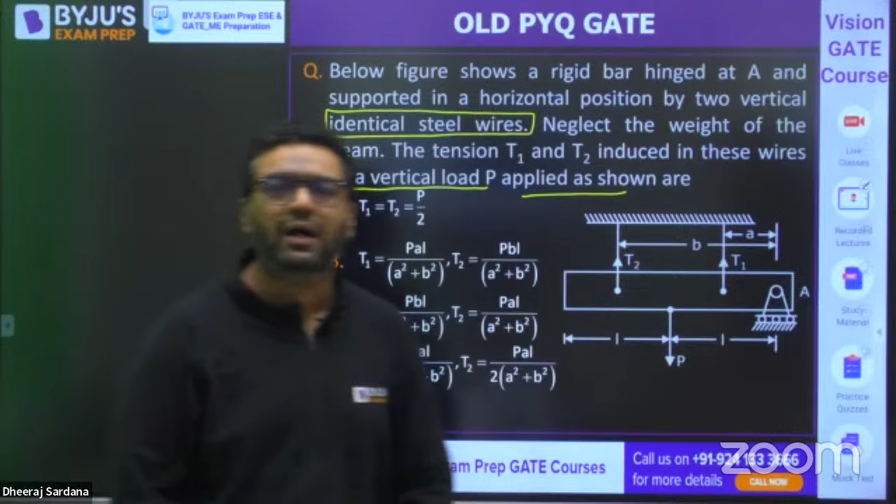So guys, will you try this or shall I start? This is a question, four options are in front of you. This is a very good question, and I strongly feel this type of question can appear in the exam. This is a very, very good question. If you want, I will give you a hint. Papa Ghoda is saying the answer is A. Very simple - it is not that simple, dear. No issues, I will be solving it for you.

So my dear, if you see this, I am taking it as the longitudinal axis of this member. At this point, you are providing a hinge kind of support - this is a hinge support. But you know that about hinge, it is free to rotate. So what will happen because of this load P? This is going to go down like that. It is not going to rotate completely because these wires will not allow that.

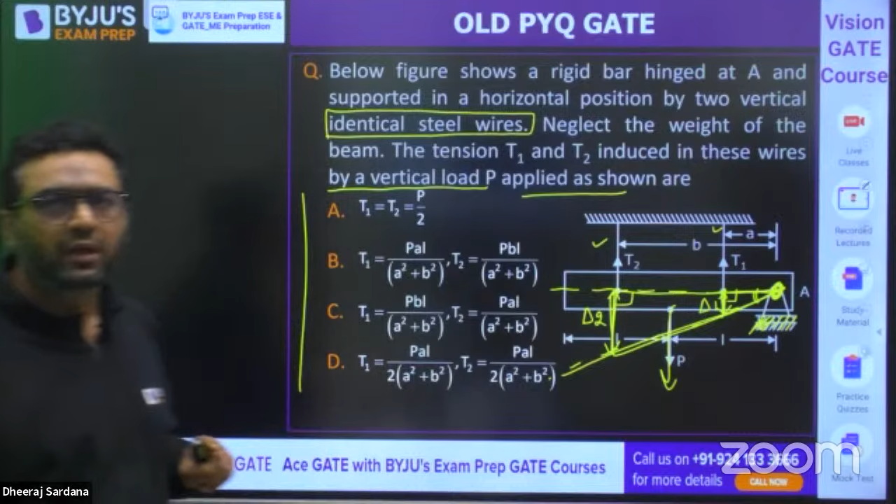When this rod goes to this position, wire 2 will be deformed by some amount - that deformation I am showing as delta 2. And this wire will be deformed by some deformation delta 1. Up to this, the rod will take this position. Now if you see, this is one triangle, this is another triangle. In both triangles, this angle is 90, this angle is 90, and this angle is common. If two angles of the triangle are equal, obviously the third will be equal, and that is why angle similarity is there. Because of angle similarity, you can write delta 1 by A equals delta 2 by B.

So by similar triangles, delta 1 by A equals delta 2 by B. Now you know we can write delta 1 as T1 L1 by A1 E1, and delta 2 as T2 L2 by A2 E2. So T1 L1 by A1 E1 equals A by B of T2 L2 by A2 E2. Since they are identical wires, E1, A1, L1 and L2, A2, E2 get cancelled out, and you get T1 equals A by B times T2.

Now, my dear, you got one relation between T1 and T2. Now you know there is a hinge point given. Whenever a hinge point is given, in GATE questions you have to take summation of moment about the hinge to be zero, and only then will you reach the final answer. So you will say summation of moment about A is going to be zero. You can see this P is creating anti-clockwise moment, T1 is creating clockwise, T2 is creating clockwise.

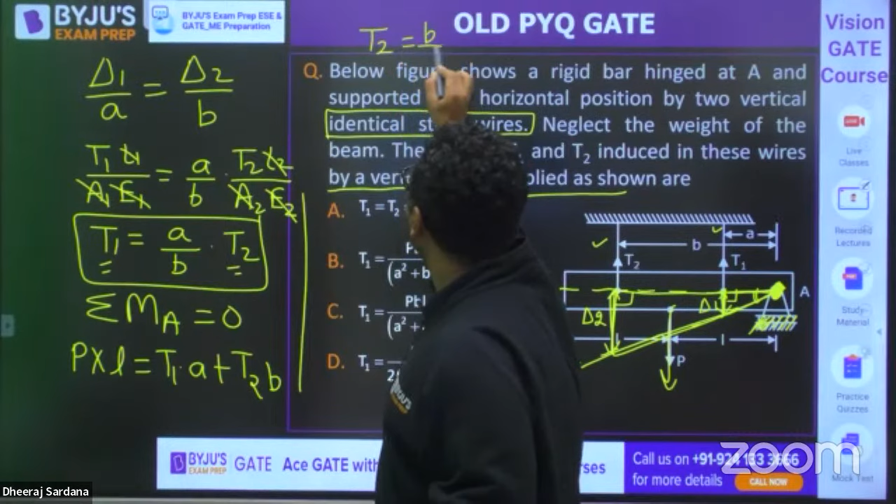So you can write P into L is equals to T1 into A plus T2 into B. Now you already know the value of T1 in terms of T2, so you would put this value. You would say P into L is equals to T1 into A, and you know T1 is A by B T2. You can also write T2 is B by A T1. So putting B by A T1 into B.

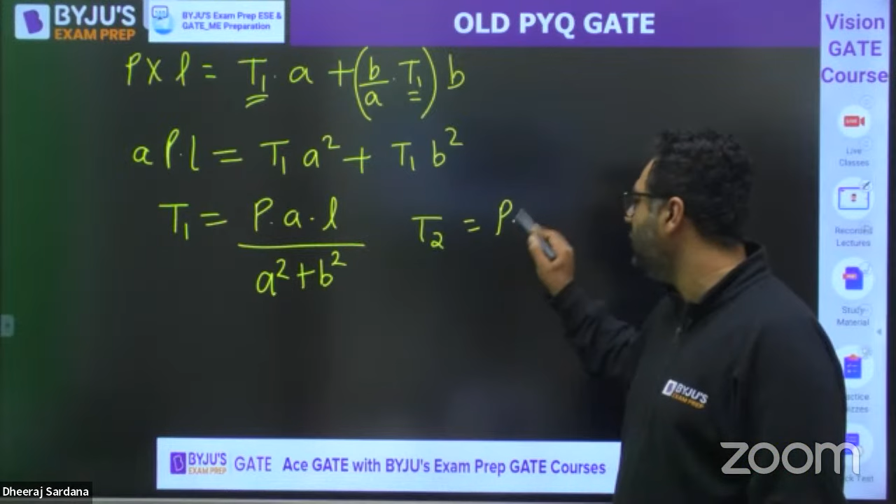Now you can see T1 is there, T1 is there, so you would be getting A into P into L is equals to T1A square plus T1B square, divided by A square plus B square. So T1 is coming out to be P into A into L divided by A square plus B square. Similarly, you will get T2 as P into B into L divided by A square plus B square.

So the answer for this question is T1 is PAL, T2 is PBL. B is the right answer.

Very good, yes thanks Ami. D2E, yes Rohan, very good. TPM, very good. Yes Harkesh Shekhar, thanks for your wishes.

So guys, the first question's answer is B.

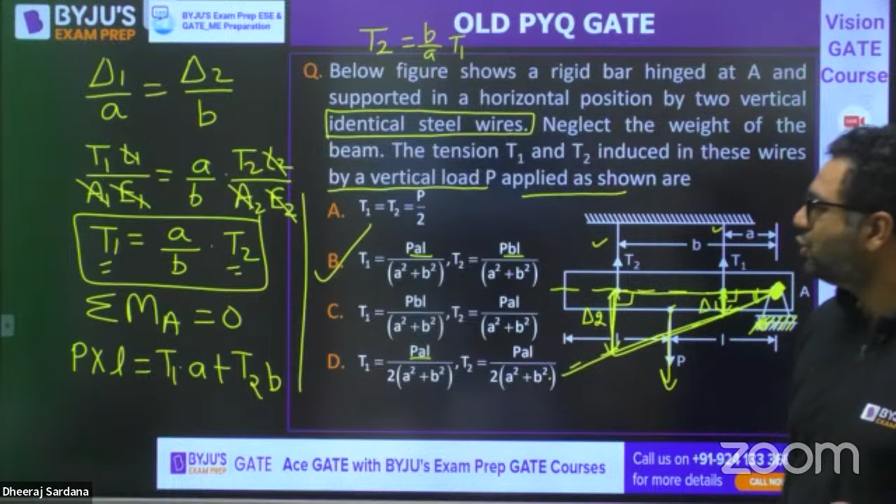Moving to the second question, this is from torsion, my dear.

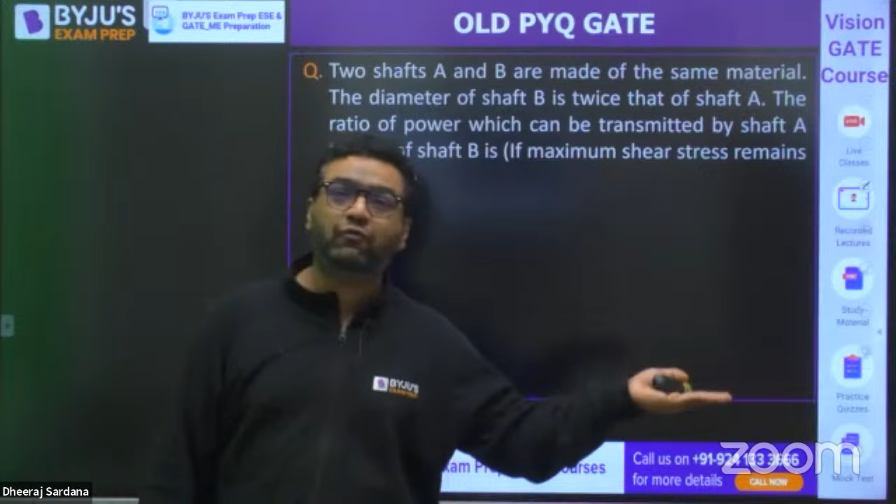These are not those PYQs which you have generally done, they are new PYQs for you. We have taken only good questions which are relevant for these years, which can come straight away. This is happening in many subjects. In industrial also, I have seen 3 questions repeated. In strength of material also, 1 to 2 questions have already been repeated. Like if you see the 2015 paper, the 1995 question was asked as it is. So that is why these questions are very relevant.

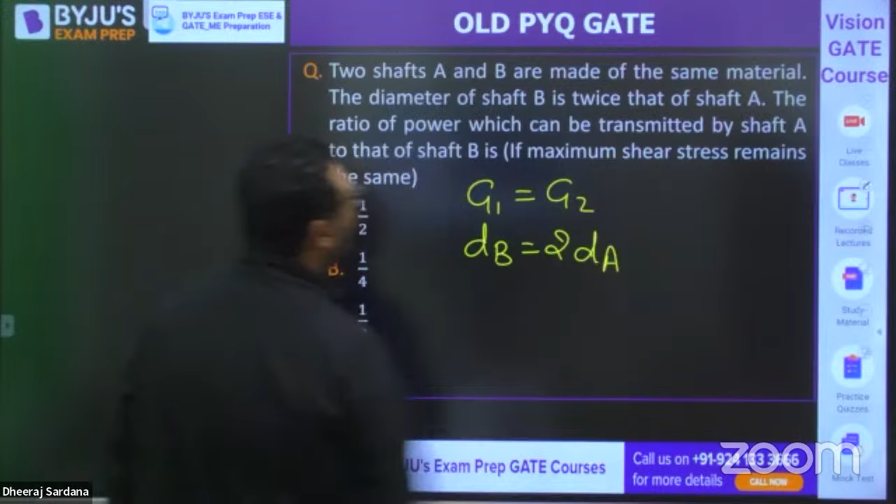This question says 2 shafts A and B are made up of the same material. When the material is same, I can say G1 is equal to G2. The diameter of shaft B is twice that of A, so diameter of B is 2 times diameter of A. They are asking the ratio of power which can be transmitted by shaft A to that of B. If you remember from the derivations, this ratio is equals to TA by TB, and that ratio is also equal to ZP of A to ZP of B.

So you know that when that is the case, you would write it as dA cube. Why dA cube? Because you know ZP is pi by 16 d cube. So when you put pi by 16 dA cube divided by pi by 16 dB cube, and you know dB is 2 times dA, the answer comes out to be 1 by 8.

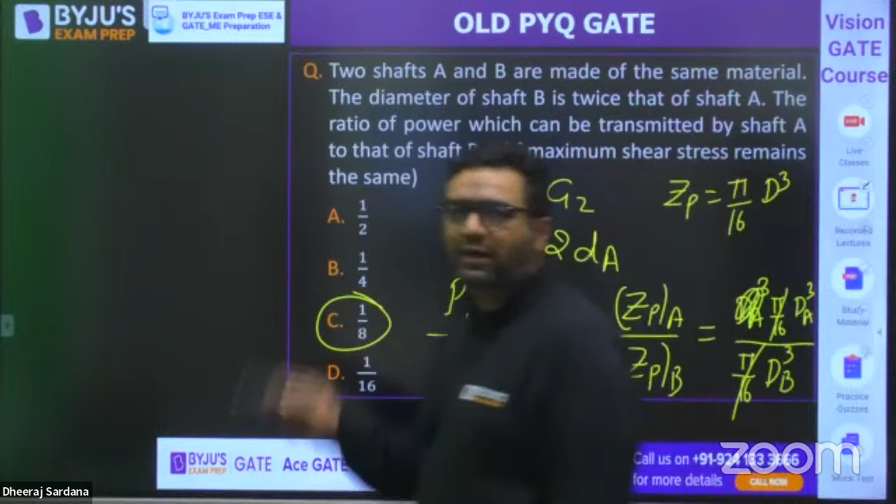Yes Rohan, you are correct. Papa ka Ghoda, TPM, everybody has given the right answer. The answer for this is going to be C, that is 1 by 8.

Very good guys, moving to question number 3, and this is related to principal stresses and strain. First of all, I am taking 5 questions, after that Abhinav sir will be joining for his questions, then once again I will come back.

So if the 2 principal strains at a point are 1000 into 10 power minus 6 and minus 600 into 10 power minus 6, then what is the maximum shear strain. This is an easy question, and the next question is something very beautiful, that question will give you a feel of GATE. So be ready for the next question, but answer this easy question first.

What would be the answer for this? Okay Nandu, Murli, so you guys are saying the answer is C. What about others? Rohan, TPM.

Okay, Rohan is saying the answer to be A. What about others? Alekia is saying A, Papa ka Ghoda is saying A.

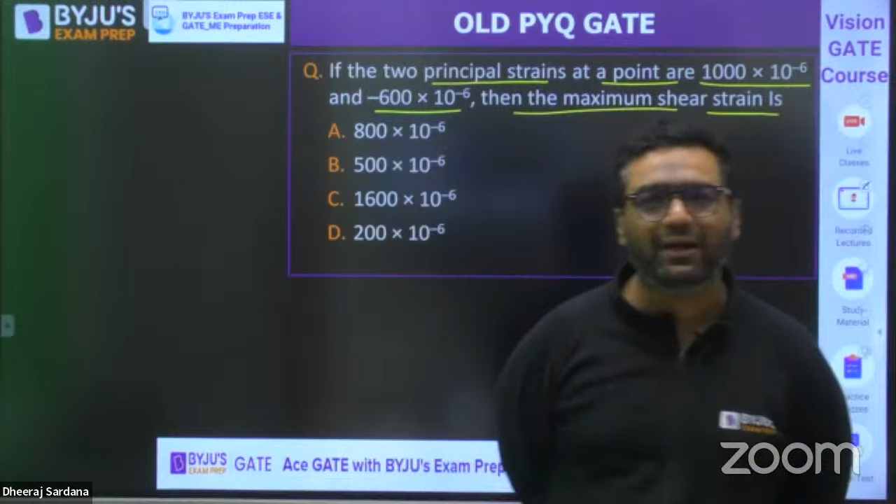TPM is saying C. Okay, so I would like to say, my dear, whenever you are writing the maximum shear

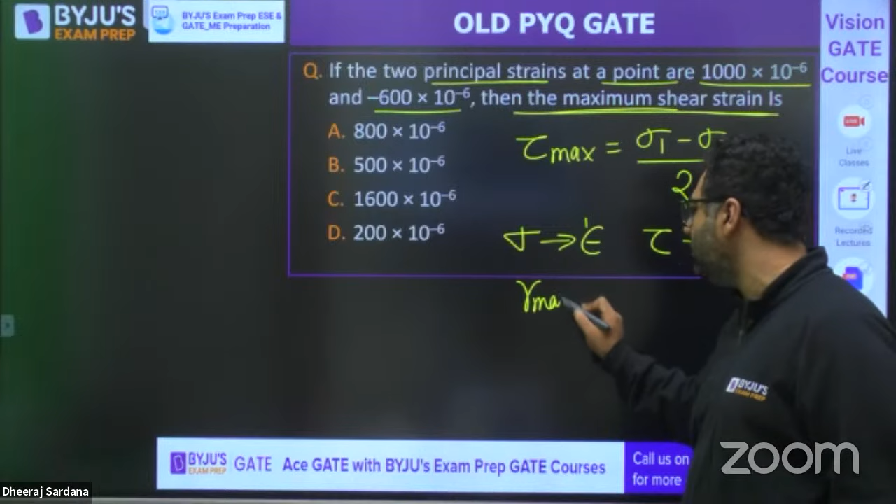strain, when you write the formula for maximum shear stress, tau max comes out to be sigma 1 minus sigma 2 by 2. But my dear, whenever we write the strain tensor with the help of stress tensor, then sigma is replaced by epsilon, tau is replaced by gamma by 2. So you would be having gamma maximum by 2 is equals to epsilon 1 minus epsilon 2 by 2. So my dear, 2 by 2 will get cancelled out.

Now you can very easily say what would be the answer. Gamma max is going to be epsilon 1 minus epsilon 2. Epsilon 1 is 1000 into 10 power minus 6, minus of minus 600 into 10 power minus 6. Answer will be 1600 into 10 power minus 6, and the answer will be C for this.

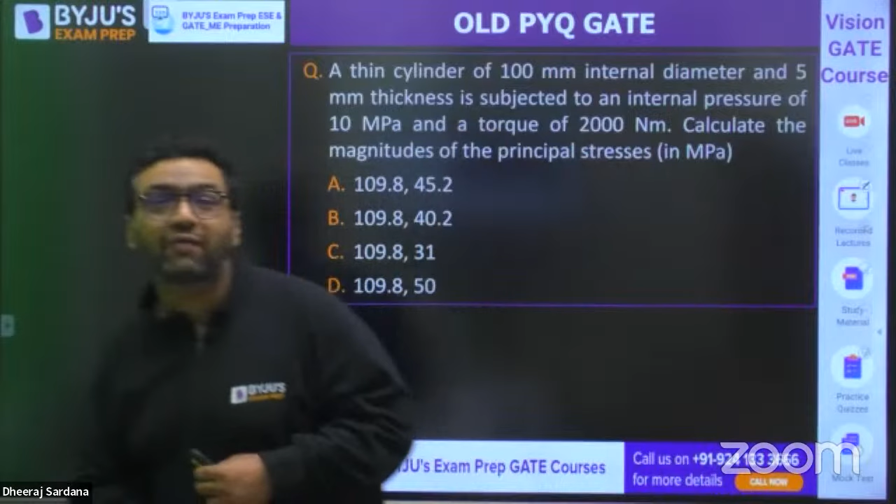This is a beautiful but easy question. Now, my dear, the next question is slightly new, maybe new for those who have not done this chapter in a nice way, but otherwise this is a beautiful question. This is a wonderful combination of principal stresses and thin pressure vessels.

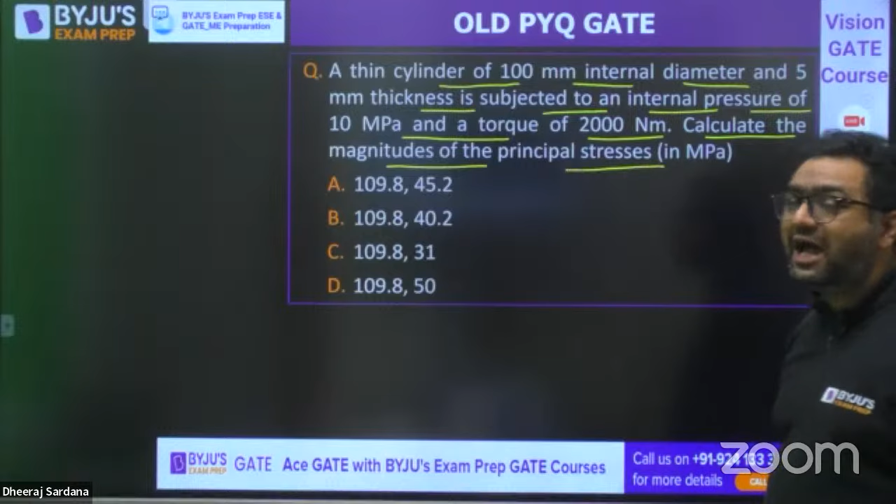If you see the question, a thin cylinder of 100 mm internal diameter and 5 mm thickness is subjected to an internal pressure of 10 MPa and a torque of 2000 Newton meter. Calculate the magnitude of the principal stresses. I will give you a hint for this because this may be a new type of question, since in recent years GATE has never asked this question.

So my dear, you already know whenever we are talking about a thin cylinder's state of stress, that when we make the thin cylinder, because of the pressure, there is a circumferential stress coming, and because of the pressure, there is a longitudinal stress coming.

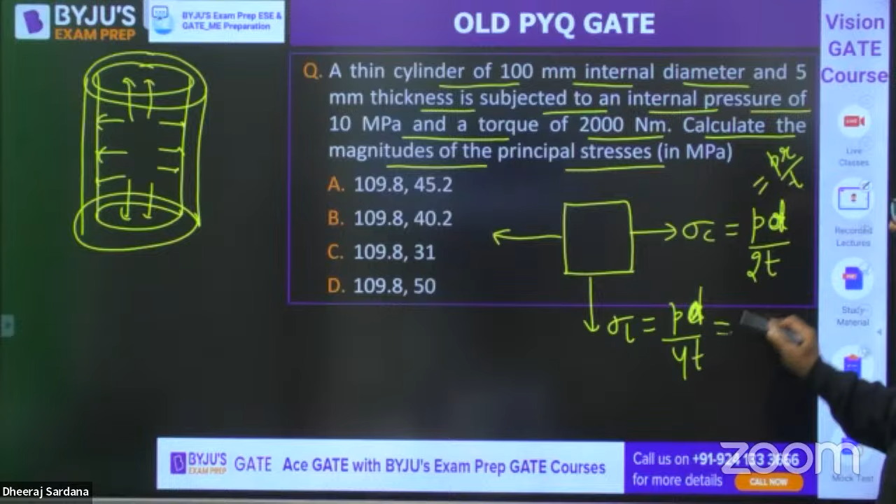So you would be making it, this is going to be the circumferential stress, which is PR by T. Okay, and this would be sigma circumferential, which is PD by 2T, and this is PD by 4T. Or if you want to write in the form of radius, it is PR by T and PR by 2T. Choice is yours in which term you want to write it.

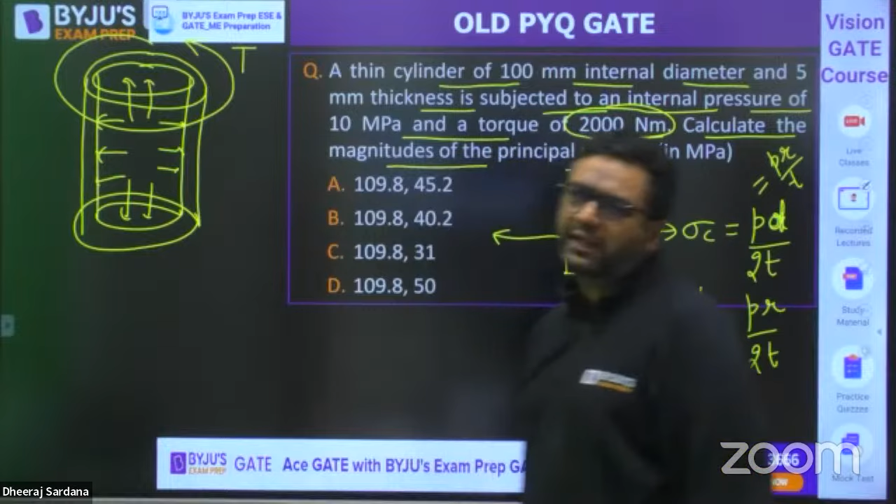So generally, my dear, we call these stresses as the principal stresses because there is no reason for shear here. But my dear, if you clearly see this question, they have mentioned that a twisting moment is applied on the cylinder. So when you apply a twisting moment onto this cylinder, equals to T, obviously it will be creating some shear stresses. And my dear, the shear stresses, if it is going to create on these planes, we will be having the shear. Whenever normal and shear are present together, it is said to be combined loading. In this case, you cannot say this circumferential and longitudinal are principal stresses.

You need to find out the principal stresses with the formula. Now, by looking at this, you can say circumferential stress is your sigma xx, longitudinal stress is your sigma yy, and you know that there is a stress tau, so tau is your tau xy. So if you know the formula of principal stresses sigma 1, 2, you would be aware that sigma xx plus sigma yy by 2, plus minus square root of sigma xx minus sigma yy by 2 whole square, plus tau xy whole square. This is the formula for principal stresses.

But to find out the principal stresses, you have sigma xx, you have sigma yy, but you don't have tau xy. So my dear, you will apply the torsion equation. You know T by J is equals to tau max by R is equals to G theta by L. So my dear, whenever you are talking about tau max or our tau xy, that will come out to be TR by J.

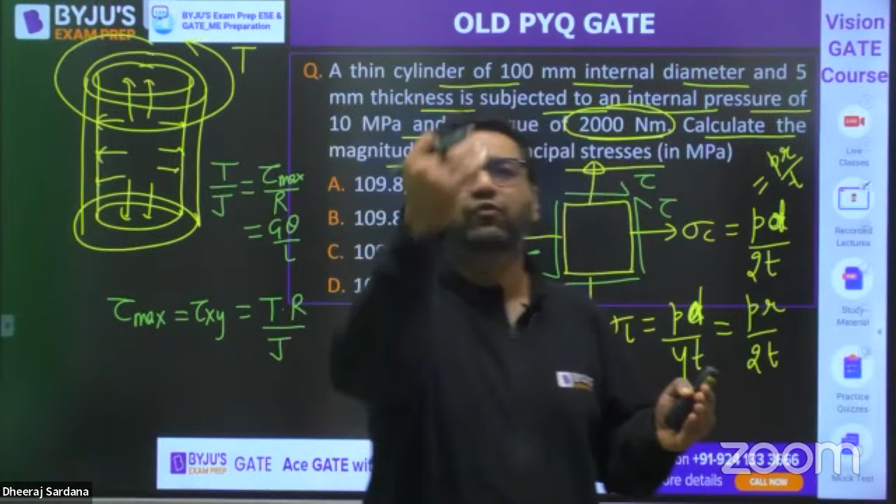Now, my dear, when we are talking about J, here is the real twist. This is a thin cylinder. If it would be a hollow shaft, we know that pi by 32 into d naught power 4 minus di power 4 will be the value of J. But here, my dear, whenever we have a thin section, the value of J is given as 2 pi r cube into T. This is the value of J for the thin section.

You derive this in engineering mechanics, and this is the approximate value for the thin section. In some books, they write this as pi dt into d square by 4. So the choice is yours, both have the same meaning. You can use any of the formulas and apply J.

You will get tau xy. Once you get tau xy, you need to put it here and you will be getting the principal stresses.

This is a wonderful question. You won't believe this type of question has come in the GATE exam many times, for 5 marks also, because before 2003 they were coming for 5 marks also, and the same question has been repeated 2 times for 2 marks also. So that is why I have taken this. You can have this type of question because 1 to 2 questions GATE people are asking with that much length. Don't worry, I will help you with the calculation.

You tell me what you are getting for the circumferential stresses. Circumferential stress is sigma xx, sigma c. It is P d by 2t. What value are you getting for this? Can you tell me? I will help you in the calculation. Don't worry, because mainly I wanted to teach you this concept.

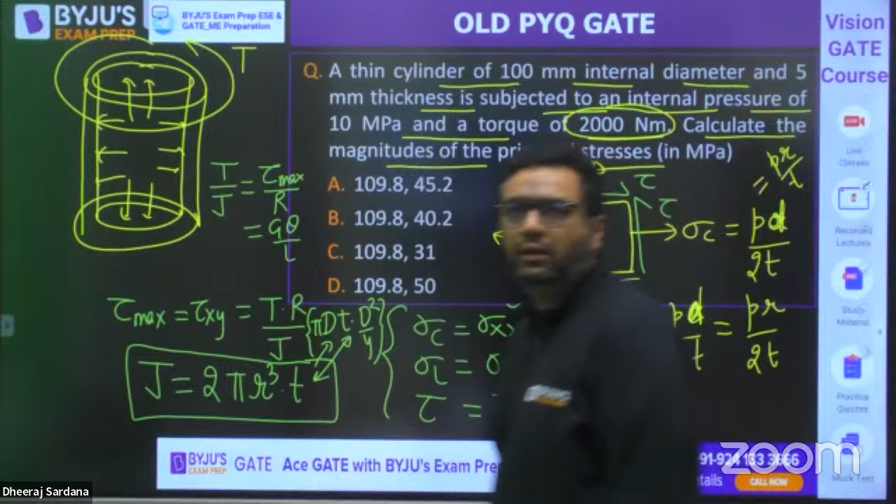Yes, Murali, Papa Ka Ghoda, Rohan, TPM. Tell me the value of sigma circumferential. Tell me the value of sigma circumferential.

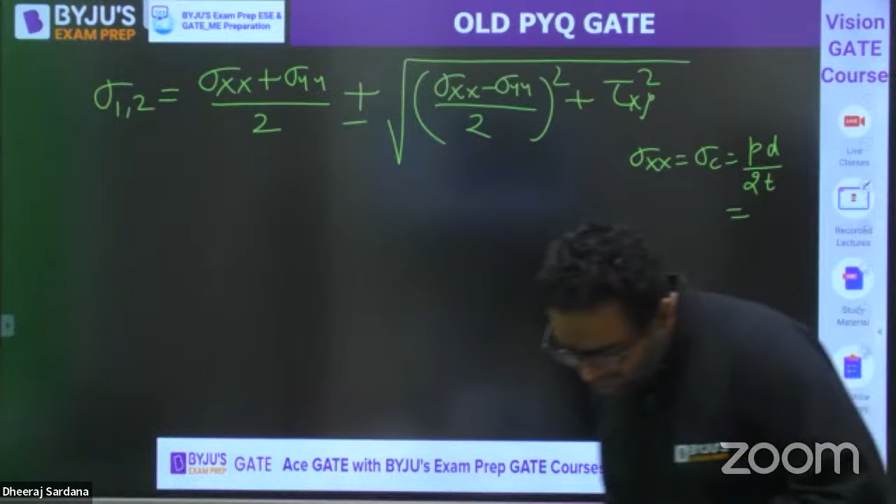You can see they have given the internal diameter as 100 mm. They have given the thickness as 5 mm. They have given the pressure as 10 MPa. They have given the torque. So when you put the value into PD by 2T, the circumferential stress would come out to be 100 MPa.

Okay, 100 MPa. When we talk about sigma yy, that is the longitudinal stress, that is PD by 4T, and that will come out to be 50 MPa by default. Yes or no? And when we find the tau max, that also I have calculated for you. Tau max, which is our tau xy, comes out to be 24.2 MPa.

So when you put these three values here, you will get the principal stresses. Wonderful, guys. So now you need to find out sigma 1 and sigma 2. I have given you all three values after calculation. Solve it and get the answer.

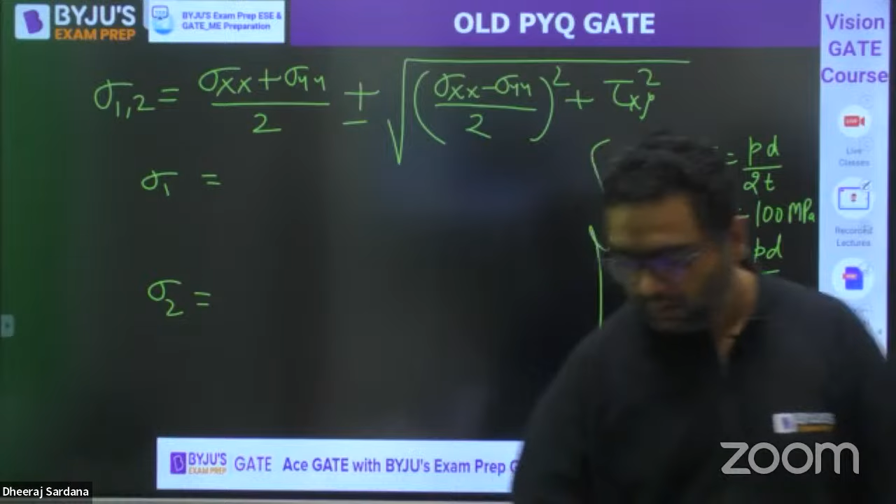Very good, Papa ka ghoda. Wonderful, dear. So now tell me the value of sigma 1 and sigma 2. Tell me, this is a wonderful question.

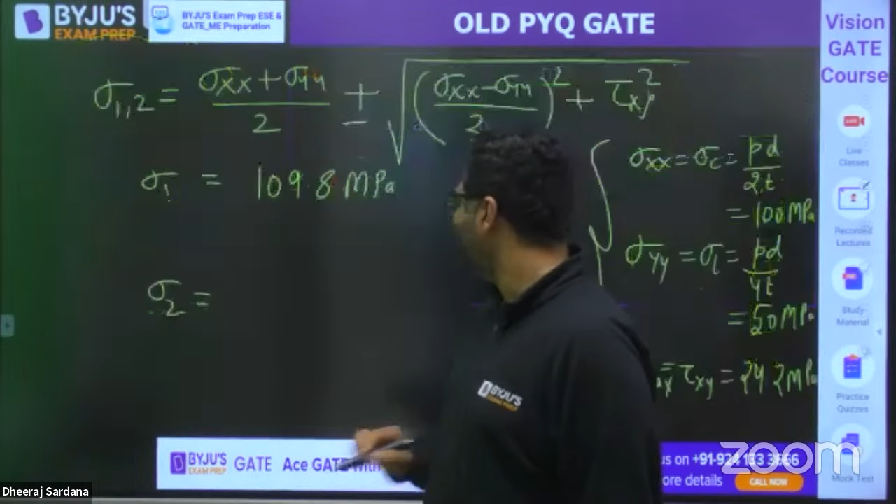TPM, you have already given option B, 109 and 40.2. That is correct. So whatever answer TPM is giving, it is the correct answer: 109.8 and 40.2. So I feel everybody got it.

This is a beautiful mixture of torsion, thin cylinder and principal stresses. Wonderful, guys. So now this was a heavy question, lengthy question, slightly difficult. So let us move to an easier one.

This is question number 5 from my side. For the case of a slender column of length L and flexural rigidity EI, built in at its base, meaning fixed support, and free at the other end. What is the Euler critical load for this?

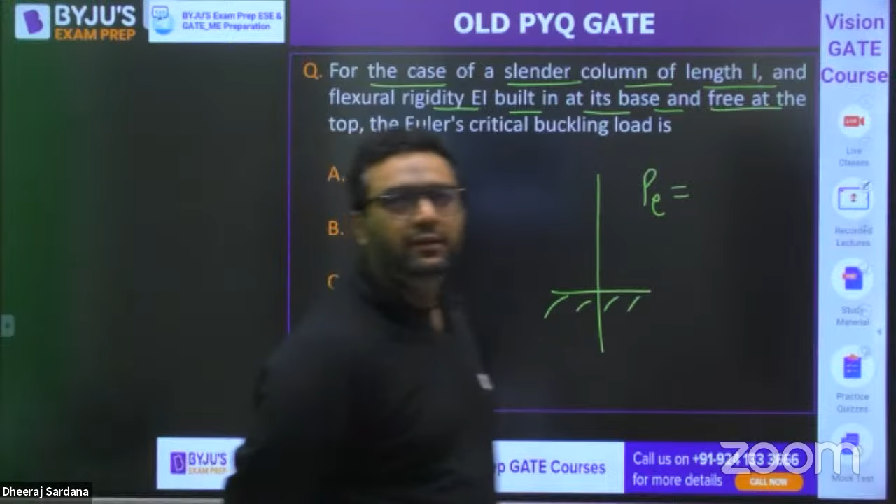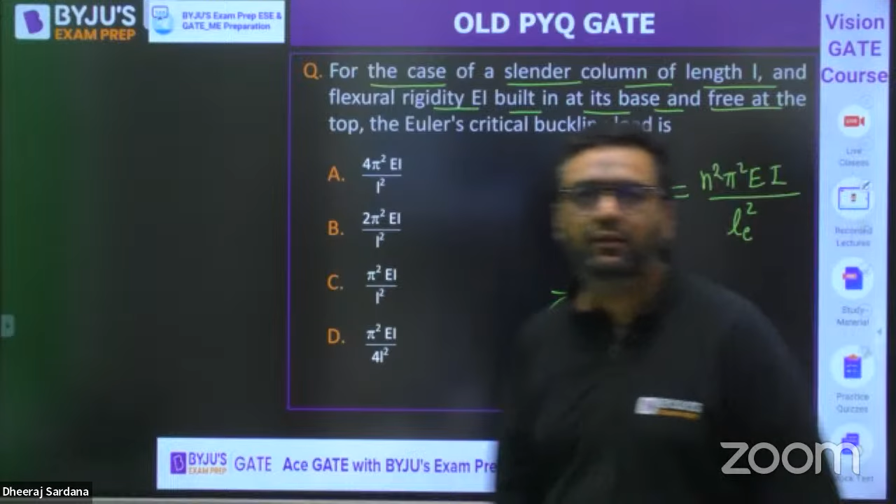Tell me. So Rohan is saying the answer is A. This is one end fixed, other end free. One end fixed, other end free. You know the general formula is n square pi square EI upon LE square. For this case, what is LE? Okay, Sushant is saying A. Arfat Qazi is saying A.

So my dear, you know that for this case, LE is 2L. LE is 2L, right? For this case, one end fixed, they are saying one end fixed and other end free. So when you put 2L and take N as 1, PE will come out to be pi square EI by 4L square. D would be the right answer. Did everyone forget the formula?

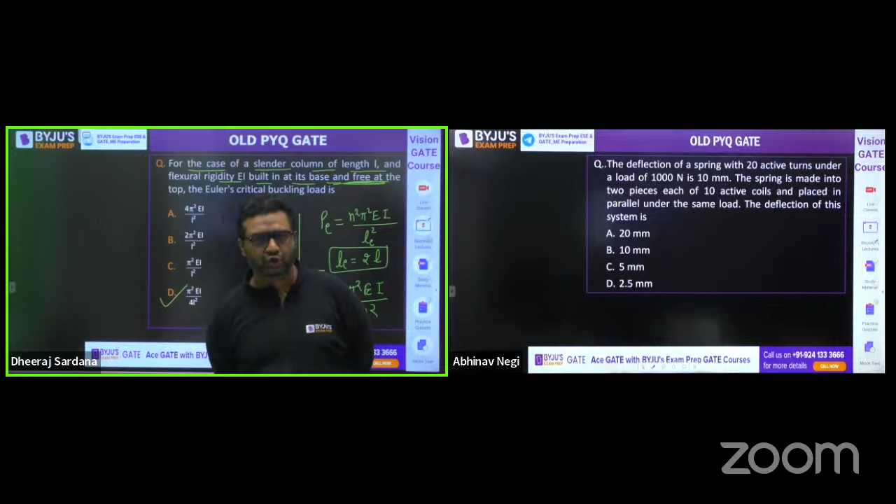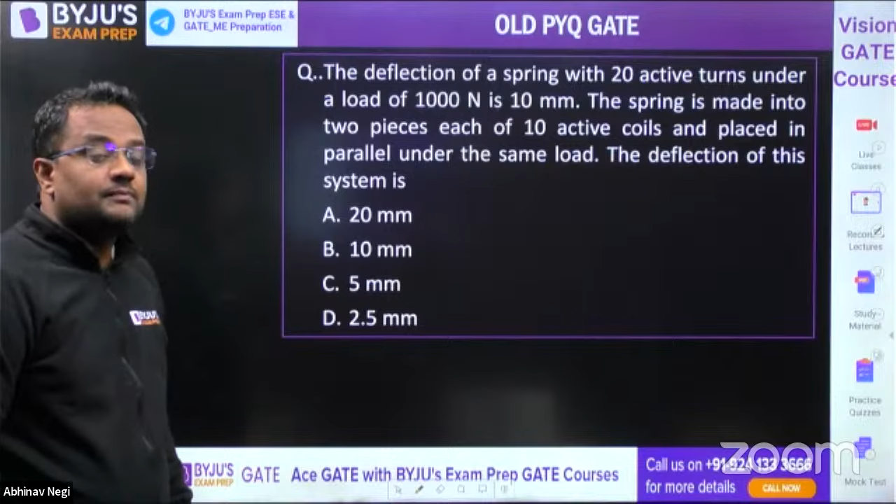Okay, this is the question guys. What is written here? The deflection of a spring with 20 active turns under a load of 1000 Newton is 10 mm. The spring is made into two pieces, equal pieces, because 20 turns are turned into 10 active turns, and they are placed in parallel. Then the same load is applied. Now what will be the deflection?

Earlier what is happening? You are applying 1000 Newton, so deflection is 10 mm. Now this spring is cut into two exact parts, and the two parts are put in parallel. So now with the same load of 1000 Newton, earlier deflection was 10 mm. Now what will be the deflection?

Before solving this, let me tell you the strain energy of a spring is 32 P squared R cubed into n by GD4. Applying Castigliano's theorem, deflection is given by del u by del P. So from here, deflection is given by 64 P R cubed into n by GD4.

What is P here? Load. What is R? From the center line, the radius at the end, that is R. n is the number of turns, and D is the thickness of these wires. D is the thickness of these wires. Now G is the shear modulus. This is the delta. What is stiffness? Stiffness is P by delta.

So P by delta from here is GD4 upon 64 R cubed into n. So when we cut the spring into two parts, material will be same, D will be same, R will be same, n is halved. So cutting into two parts, earlier the stiffness is K. If earlier the stiffness is K, now it will become 2K. So the K equivalent now in this case for parallel is 4K.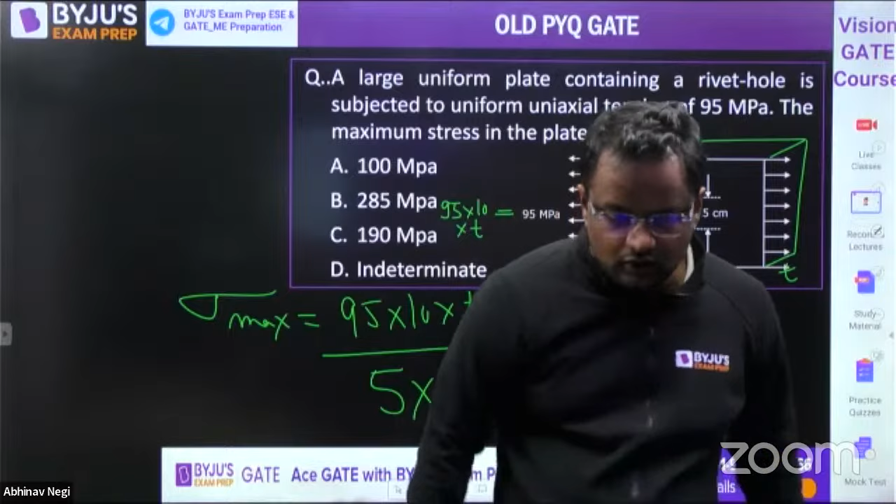Can any one of you tell me this sigma max is on which assumption? You might be thinking sigma max is fine, but it is based on an assumption. Tell me, this is on the assumption that there is no stress concentration.

That there is no stress concentration, guys. In actual life, in actual reality, stress is concentrated where there is discontinuity. Here there is discontinuity, because here it is material and here is empty. At this point, here it is material, here it is discontinuity. So actually at these points, stress concentration will be there, and there will be more stress.

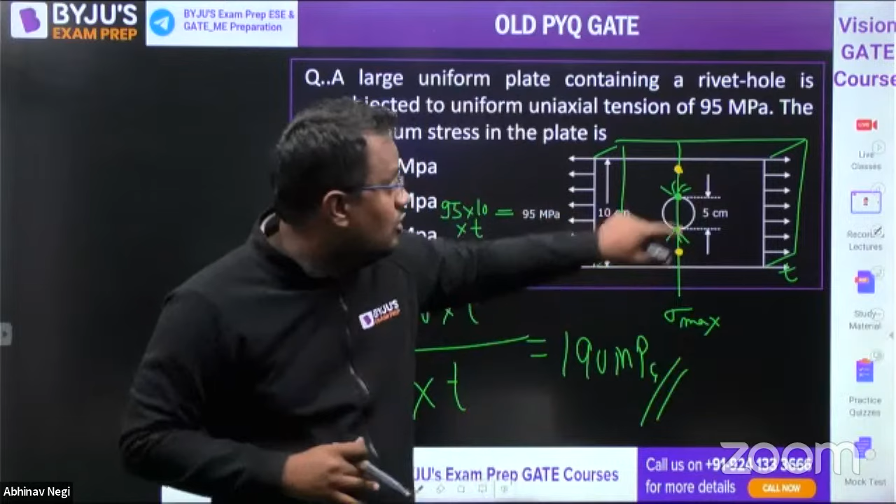Guys, this green point and this orange point. Orange point will, in reality, be having lesser stress, because at the orange point, material can go everywhere. But at the green point, on one side there is empty space, no material, only material is here. So the green point's stress is more.

In actual life, if you see the stress, it will be like this, and where there is a hole, stress will be more. So this is the actual scenario, but in our assumption, we assume constant stress all over.

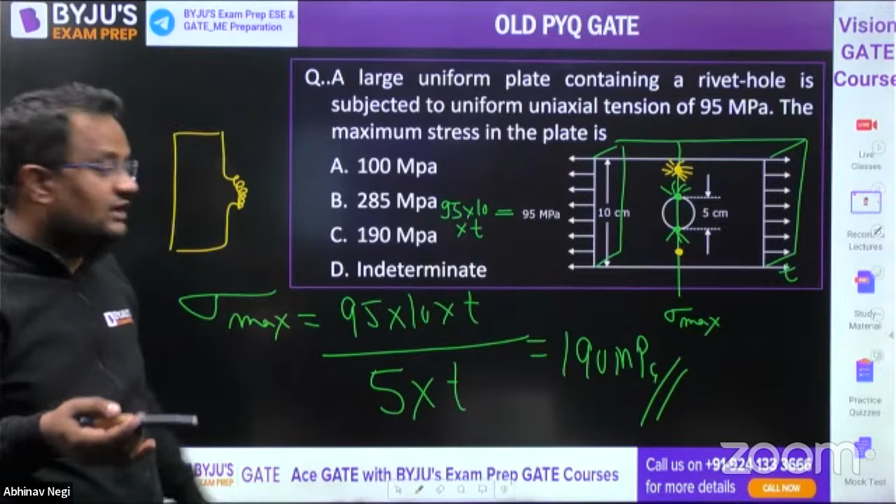An elastic body is subjected to a tensile stress X in a particular direction and a compressive stress Y in its perpendicular direction. So here is tensile stress X and here is compressive stress Y. Of course, one is tensile, one is compression, and magnitude wise they are not the same.

Now, on the plane of maximum shear stress, what is this condition? Suppose if their magnitude wise is same, then what happens? Our Mohr circle will be like this, with X point as tension and Y as compression. Then on the plane of tau max, because the center is exactly at the origin, on the plane of maximum shear stress, the normal stress will be 0. A will be the option in that case.

But here X and Y are not the same magnitude. This was the case when magnitude of X equals magnitude of Y. But in our case, the Mohr circle will look like this, with normal stress and shear stress axes. Suppose X is greater than Y, then it will be like this. If Y is greater than X, it will be somewhere here, but not symmetrical.

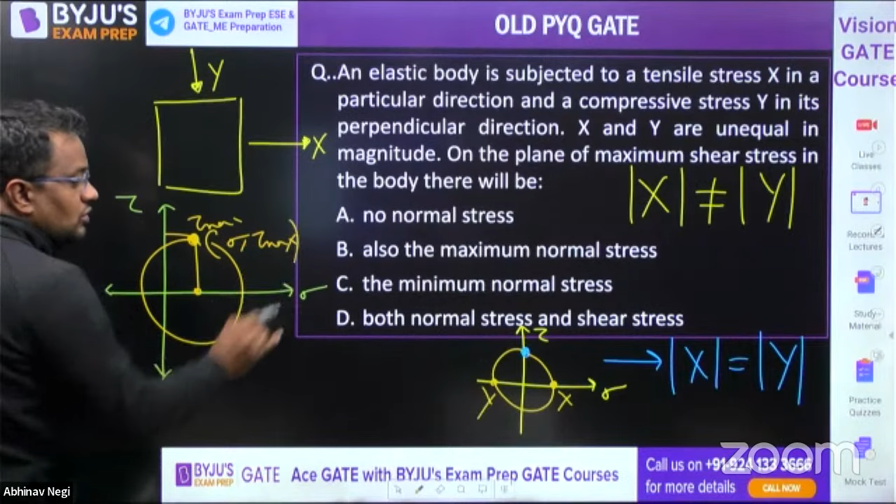So on the plane of tau max, this is the tau max, this is the plane of tau max. Here we are getting an X coordinate also, and we are getting a Y coordinate also. So both normal stress and shear stress will be coming.

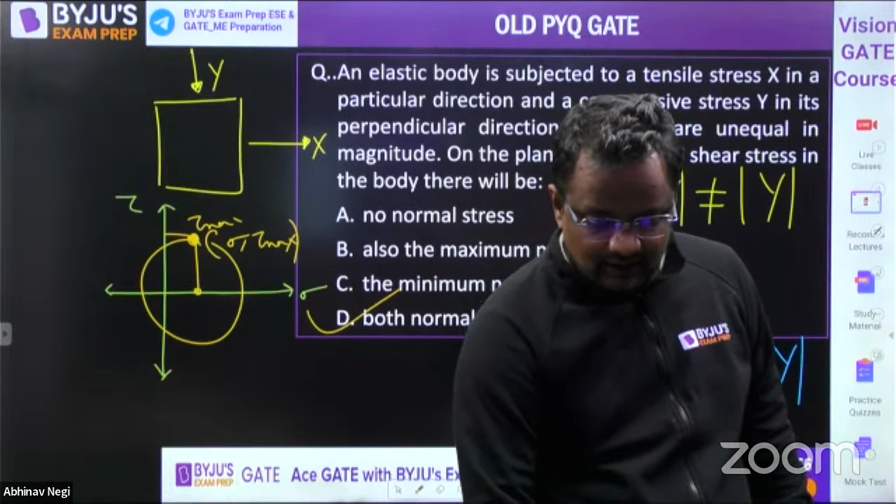Okay, moving further to the next question. A cylindrical elastic body is subjected to pure torsion about its axis. Pure torsion means no moment, no shear force, no axial force, nothing else is coming, just pure torsion. Suppose this is a cylindrical body like this.

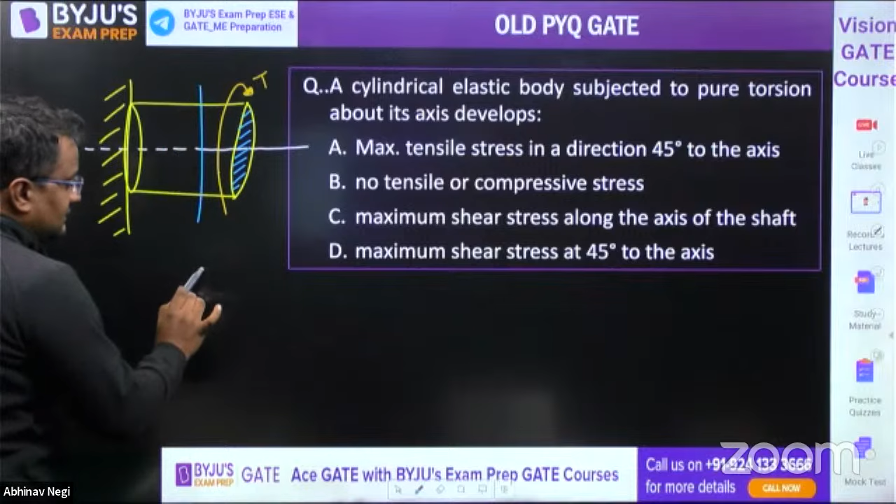Suppose it is fixed here also, and in this fixed body we are applying a pure torsion like this. Now, if I consider this plane, understand this one: in this only shear is coming. So if I take a plane like this, it will be a case of pure shear because torsion only produces shear.

My sign convention is the right hand thumb rule: if it is going inside, it is a positive torque, and positive torque causes positive shear stress. This element, as per my sign convention, is positive. Now, this is the case of pure shear stress.

So pure shear stress represents this. This is the shear stress, this is the shear stress, this is the sigma. Let me take a different color for this: pure shear will be like this. Now, this blue one is representing this point on the Mohr circle, because these points are having tau, but the x-axis is 0. So this thing is representing these points.

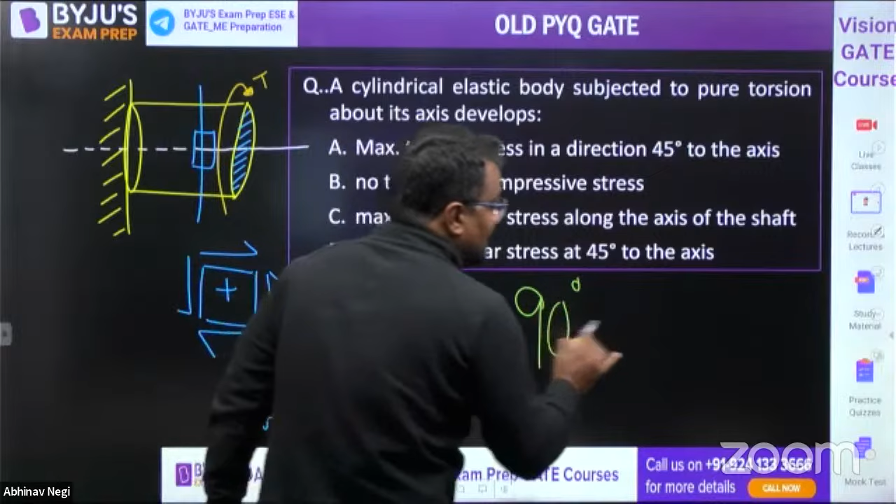Now, this is the shear stress when we take an element directly on this plane. Now, when we rotate, where does the principal stress come from? Principal stress, major or minor, comes 90 degrees from here. So in the Mohr circle, it is 90 degrees. In real life, the angle is represented by half, so it is 45 degrees. Maximum tensile stress or compressive stress is at 45 degrees. So if I cut a plane at 45 degrees, this plane will be having the maximum principal stress. Guys, one question also comes up in objective and subjective exams.

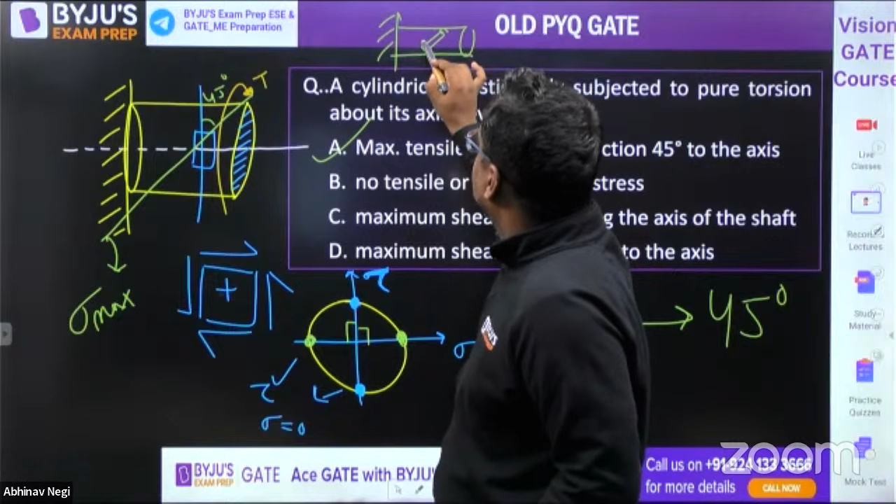They give a strain gauge at a 45 degree angle, like this, 45 degrees from the axis. Now whenever we do such questions in objective and subjective, we think only one strain value is given, something is missing in the question. No, nothing is missing. Actually, that strain gauge which is at 45 degrees will be giving the principal strain.

Give me yes or no. Have you understood or not? Everybody, in the comment section.

Please, please, please, come on. Come on, come on. How tension, why not shear?

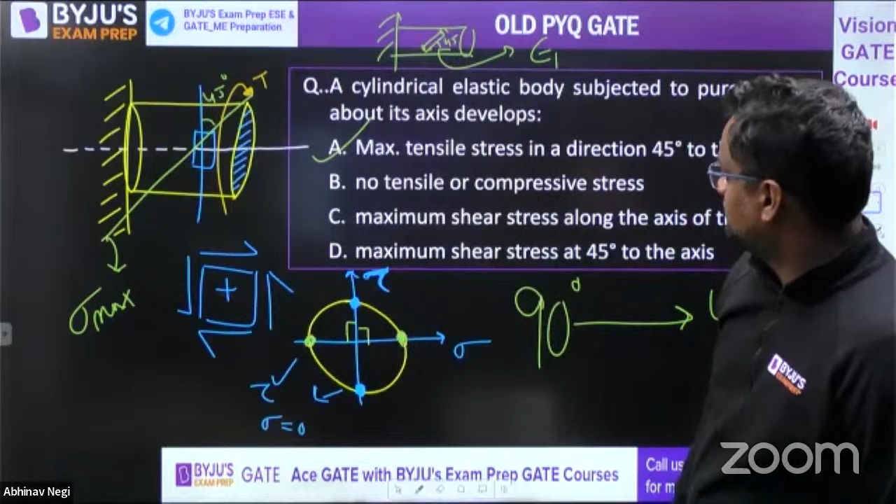How tension? Why not shear? Because at 45 degrees when we go, at 90 degrees in the Mohr circle, this is only the x coordinate, shear y coordinate is 0. So at 45 degrees in real life, that means in the Mohr circle we go 90 degrees, so the y coordinate, that is shear, is 0.

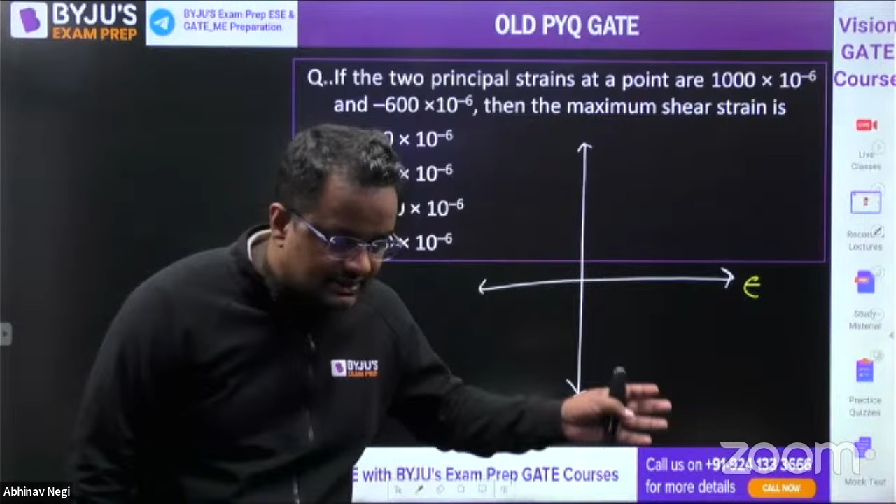Now this one, please. Everyone, Mohr circle for strain. Guys, let me tell you that in the last 3 years in civil engineering, every time, in every set, morning set, evening set of 2021, 2022, morning set, evening set 2023, morning set, evening set of civil, they are asking a question of transformational stress. So if I represent it for strain, they may ask this here.

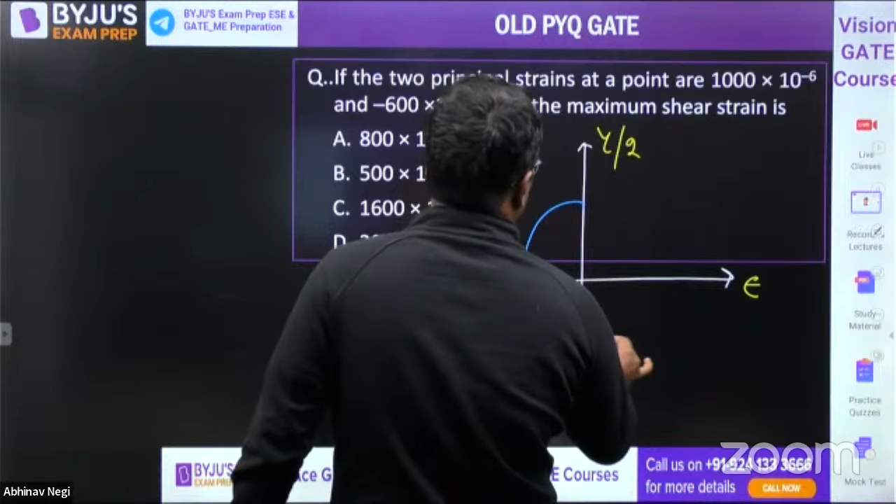So here it is gamma by 2. Everywhere in transformational stress, wherever we are using sigma, we replace it by epsilon, and where we are using tau, we replace it by gamma by 2. Let the Mohr circle for strain have two principal strains, one is 1000 into 10 to the power minus 6, and the other is minus 600 into 10 to the power minus 6. So what is the diameter of this?

Diameter of this is 1600 into 10 to the power minus 6. So what is the radius? Radius is 800 into 10 to the power minus 6. And what does the radius represent here? In case of stress, radius is tau max. So here the radius represents gamma by 2 max, that is 800 into 10 to the power minus 6, representing the maximum y-axis value. So gamma max is equal to 1600 into 10 to the power minus 6. That is option C. Understood?

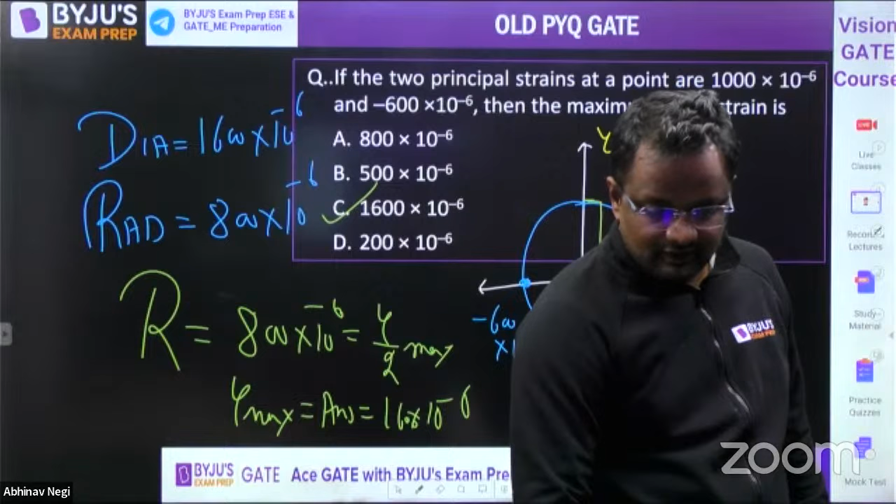Understood? Yes or no? Everyone, got it? Mahesh? Deepa, good. Everyone got it? Shall we move further? Shall we move further?

Okay, now this is the question. Interesting question. This is a 3-star question, yaar. This is a 3-star question.

Now they're asking to determine the temperature rise necessary to induce buckling in a 1 meter long circular rod of diameter 40 mm, shown in the figure below. Assume the rod is pinned at its ends and the coefficient of thermal expansion is alpha.

Using Euler's buckling load, due to a force there is a buckling load. For this case, the critical load is pi square E I minimum upon L effective square. L effective for both sides pinned is L. So pi square E I minimum is pi by 64 into d to the power 4, divided by L square. Everything is given here, now this is the load.

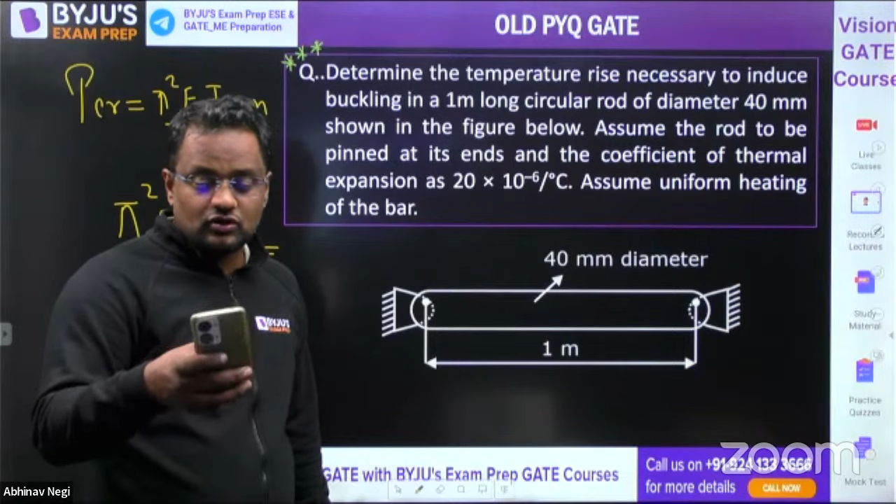Due to the thermal stress, both sides cannot elongate, right? So what is the stress in that case? It's E alpha T. Tell me, the stress is E alpha T, yes or no? Yes, stress is E alpha T.

So stress is E alpha T, but we want PCR, not stress, it's load. So E alpha T into area. What is the area? Pi d square by 4. Now in this whole equation, only E will be cancelled. Diameter is known, everything is known, T we have to find out.

Assume the rod is pinned, coefficient of thermal expansion is given, assume uniform heating. We have to determine the temperature rise. Everything is given, we just have to find the temperature. Tell me how much you are getting. Everyone, not having calculators.

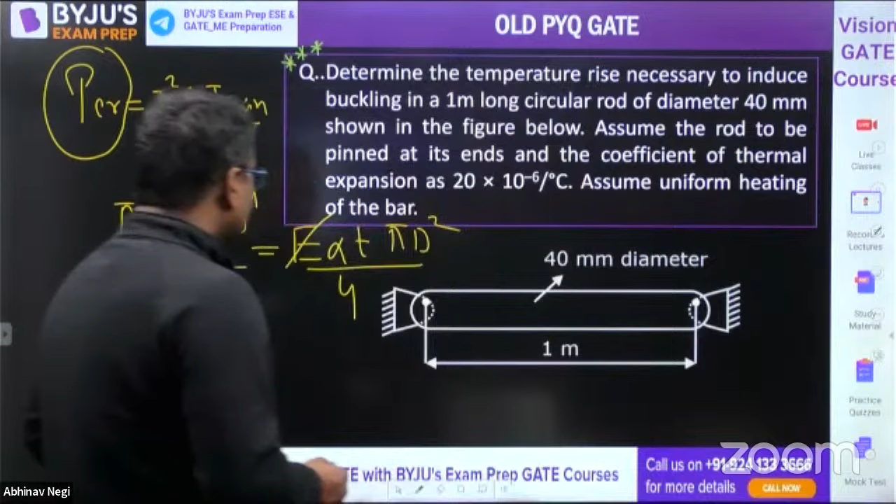So here guys, what we are having, the temperature value I have already calculated for you, so time is not wasted in the class. The area temperature is 49.34 degrees Celsius.

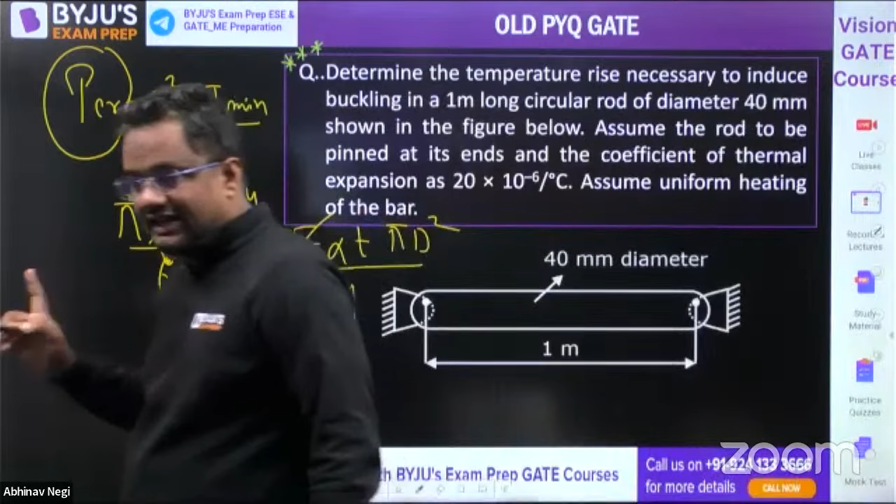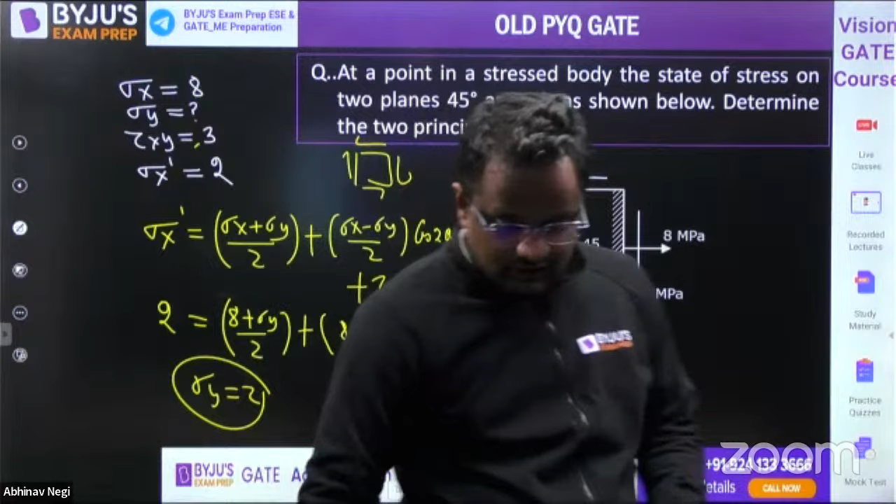If you, for this question, Rahul, you are saying? For this question? Are you saying for this question?

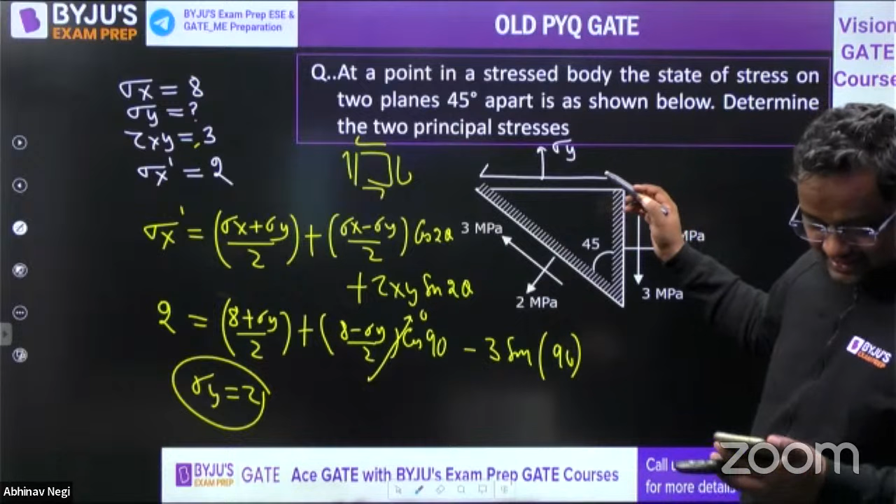Now guys, sigma 1 and sigma 2 is sigma x plus sigma y by 2, plus or minus square root of sigma x minus sigma y by 2 whole square plus tau xy square. Now sigma x is known, sigma y is known, tau xy known, everything is known. From here the final value is 9.2 megapascal, the major principal stress, and minor principal stress is 0.7 megapascal.

Give me yes or no. Okay no, Rohan, here we are getting this one. Give me yes or no please.

Give me yes or no. Tell me. Everyone, any doubt till now? Any doubt till now, please? Please guys. Vineet, how are you? How's the health now?

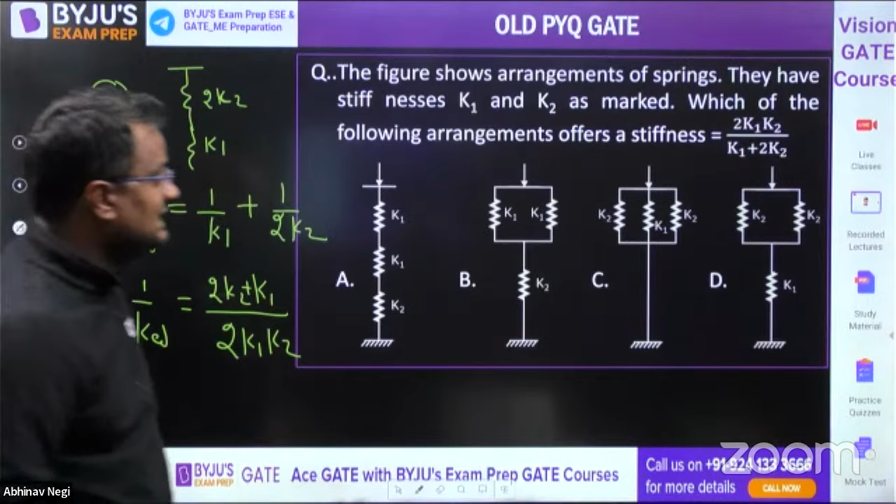Those two are in parallel and one is K1. So 1 by K equivalent is 1 by K1 plus 1 by 2K2. So here it is (2K2 plus K1) over 2K1K2. This is 1 by K equivalent. K equivalent is the reciprocal of this. That is matching, so D will be the answer.

Got it? Got it friends? Everyone? Everyone got it now? Okay.

Now this question: calculate the stress at the bottom of support at point A. So guys, here the stress is two stresses - one is direct stress and one is bending stress. Direct stress is compression, force by area. Area is pi d square by 4. So it is 4F by pi d square - this is the direct stress.

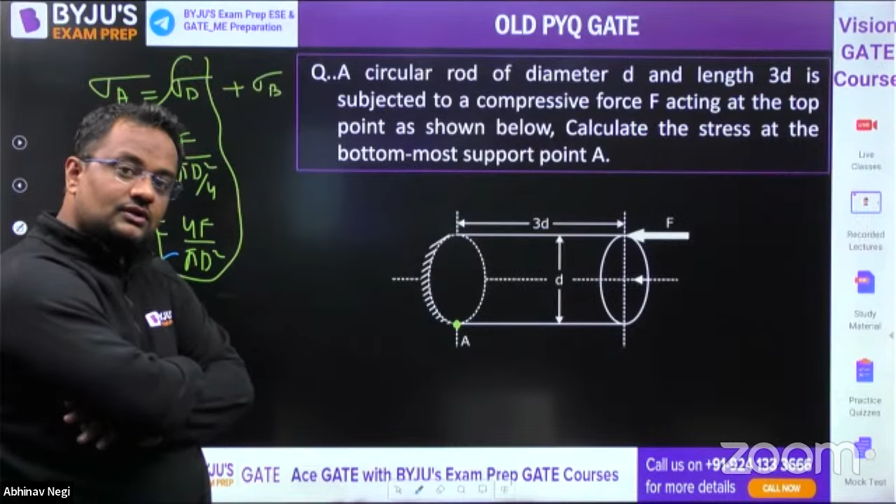Now what is the bending stress? First of all, direct stress is compressive. Now what will be the bending stress guys? M by I into Y. And that M by I into Y will be compressive or tensile - please let me know, I want to see all your answers. That M by I into Y will be tension or compression? This is compression - tell me please. Everyone, that will be tension or compression?

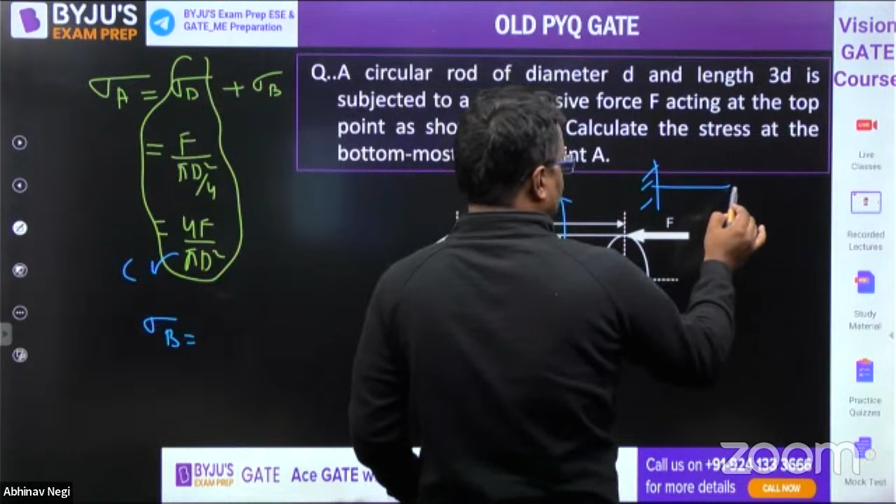The moment about this will be anti-clockwise. So this force F will be trying to make it like this, so it will be in tension. The moment about A is anti-clockwise, like this. Suppose this is a beam and the moment is anti-clockwise, so it will make tension at the bottom, na?

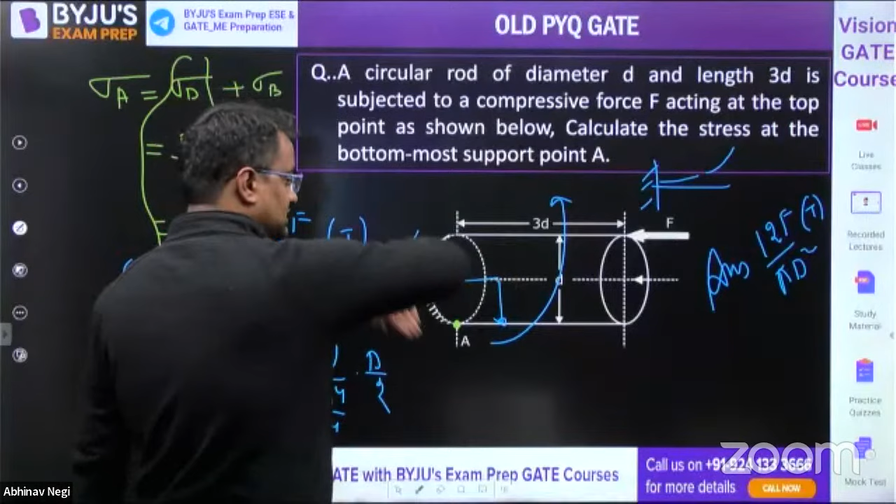Yes Dheeraj sir, now you can come.

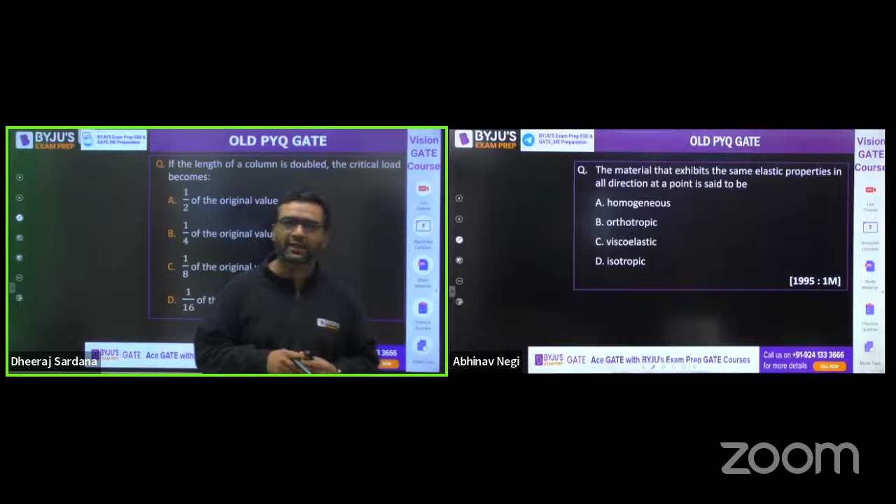You know, for that we have two things: the one equation is T1 plus T2 equals T, and the second equation is theta1 plus theta2 equals 0. You need to apply these two equations and you will get the ratio of T1 and T2. Try this question, guys, this is from Torsion. I hope everybody would be giving the right answer for this.

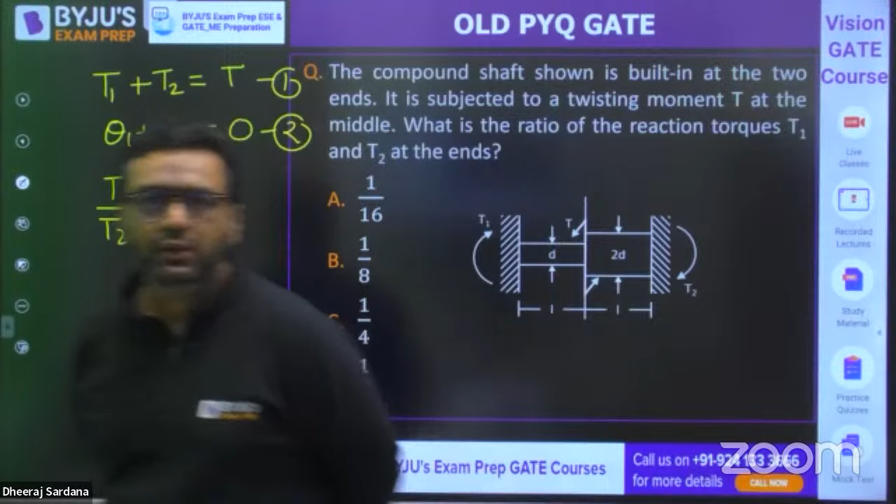Yes, Prakash, Vineet - so Vineet is saying the answer to be A. Okay, what about others? Vineet, you are here after so many days, I feel so. What about others? What would be the ratio, guys?

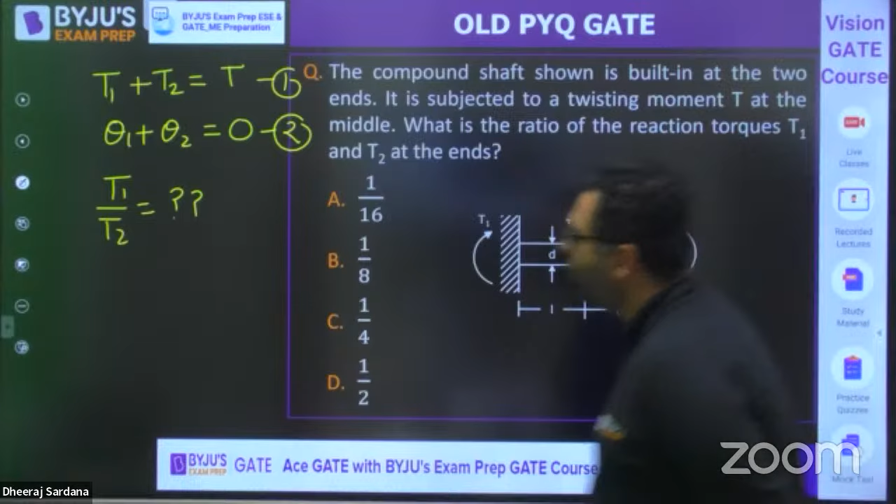So my dear, when you use this equation, theta1 will be coming out to be minus theta2, and it can be written as T1 L1 by G1 J1 equals minus of T2 L2 by G2 J2. They have mentioned it is a compound shaft, meaning they are taking the same material, and they have given the same length, so length gets cancelled out. So only the difference is in the diameter, and we can write T1 by T2 equals minus of J1 by J2.

Forget about the minus sign, we need the ratio. So J2 by J1 will be pi by 32 D2 to the power 4, by pi by 32 D1 to the power 4. I feel you will be getting the answer as - are you getting 1 by 16? I feel it is J1 by J2, yes D1 by D2, so the answer will be 1 by 16. So A is the right answer. Yes, very good, A is the right answer.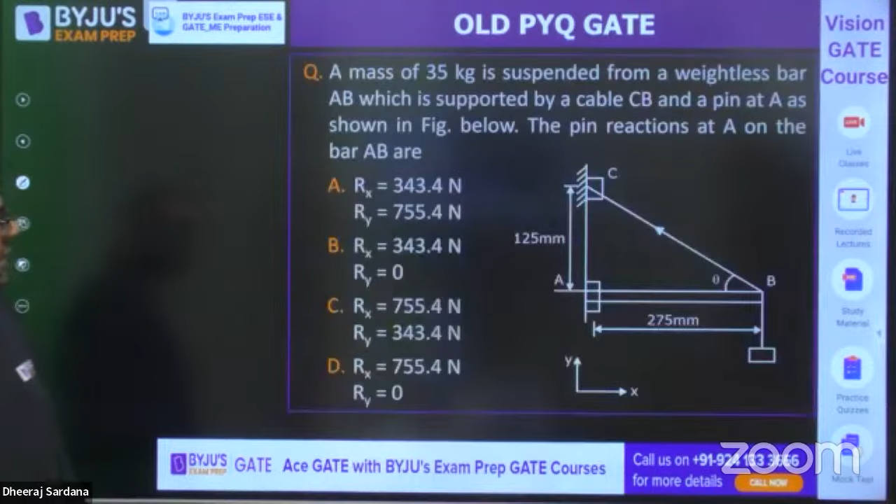Moving to the next question, guys. This one already has been done by sir, this also has been done. Now, before this, let us do one more question. This is from SFD BMD, support SFD BMD, a concentrated load P acts on a simply supported beam.

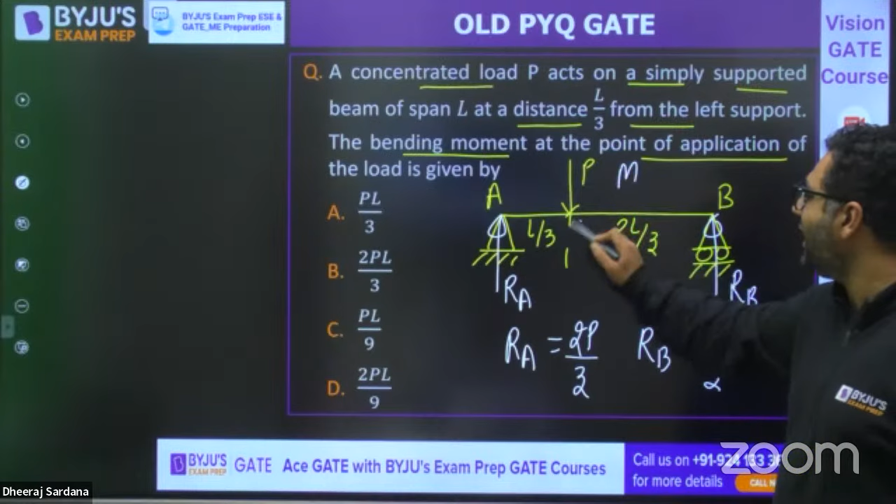Yes, we need to apply shortcut only. RA will be equal to 2P by 3, and RB will be P by 3. So you know what would be the moment? Moment at C will be 2P by 3 into L by 3, answer will be 2PL by 9. So D is the right answer.

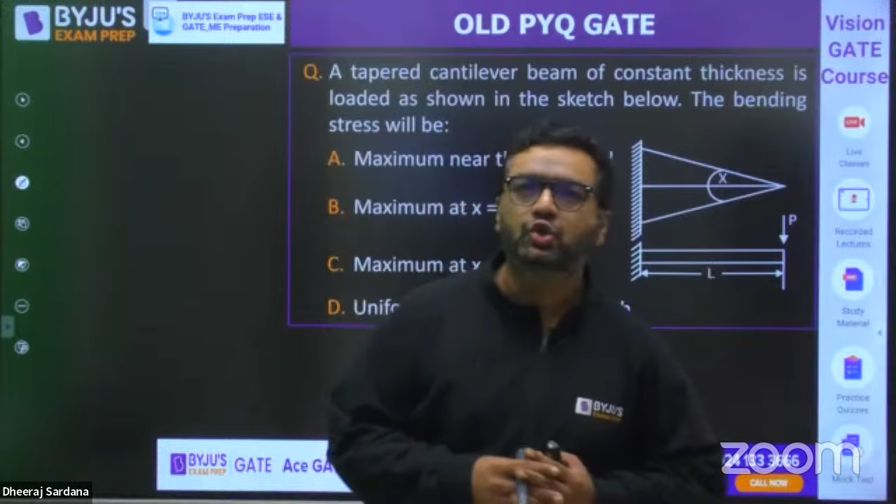Yes, very good guys, so we are now moving to the last question. Yes, this is the last question. So guys, this is the case you have seen at the time of bending when we study beam of uniform strength.

A tapered cantilever beam of constant thickness is loaded as shown in the figure. The bending stress will be maximum near the fixed end, maximum at x equals 1 by 2L, maximum at x equals 2 by 3L, or uniform throughout the length. So you can see width is varying like that, width is varying linearly.

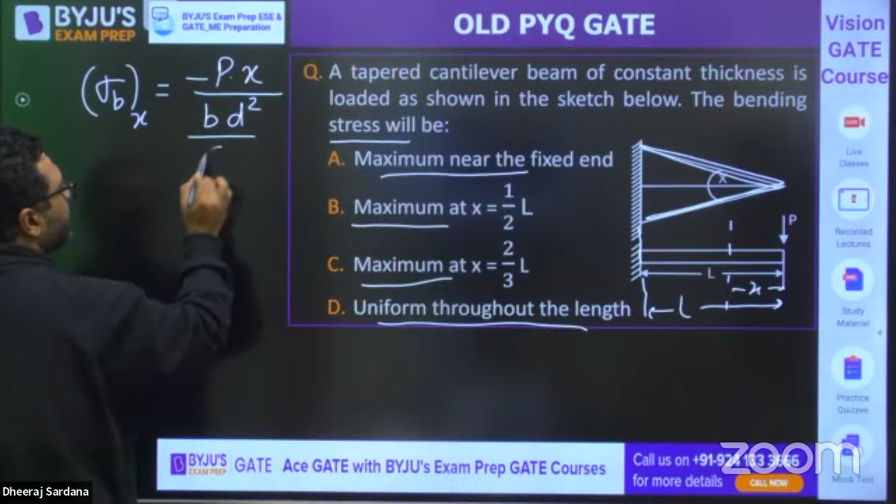So if we take two sections, one at a distance of x, other at a distance of L, if you write the bending stress at distance x, you will have minus P into x as the bending moment, and BD square by 6, where B is variable, so bx. Then bending stress at length L will be minus P into L divided by the total width B at this end, so B into D square by 6.

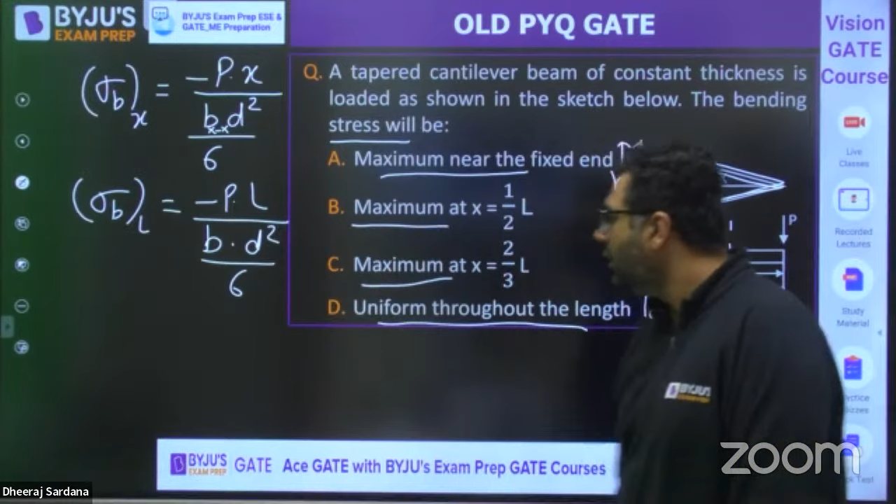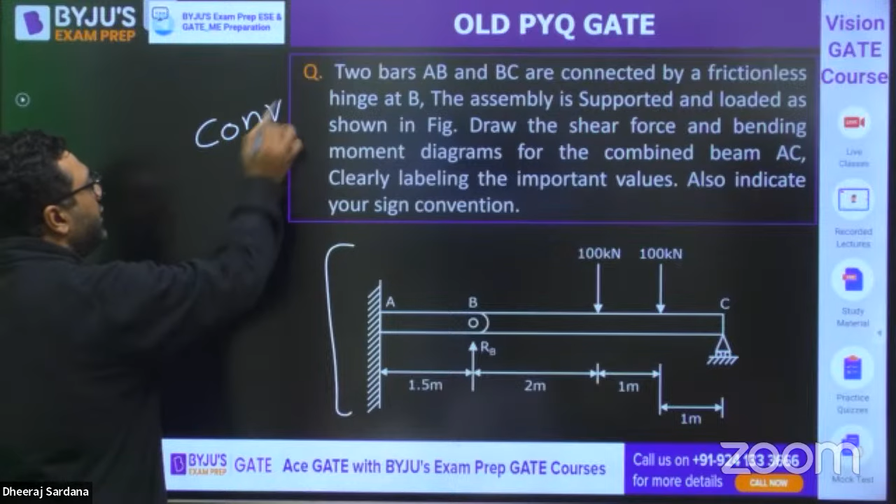This question says, make the SFD BMD. They have given this compound beam to you and you need to make the SFD and BMD for this case. So this is a conventional question. I intentionally kept it, this came for 5 marks. You can draw it and share it on my Telegram channel if you want it checked. Mechanical by Dheeraj Sardana is my Telegram channel. So this is the homework question for you guys.

Okay, is it clear for everyone? Video is coming or not, guys? I feel there is no such problem, Yamuna. Yes, everybody, is it clear?